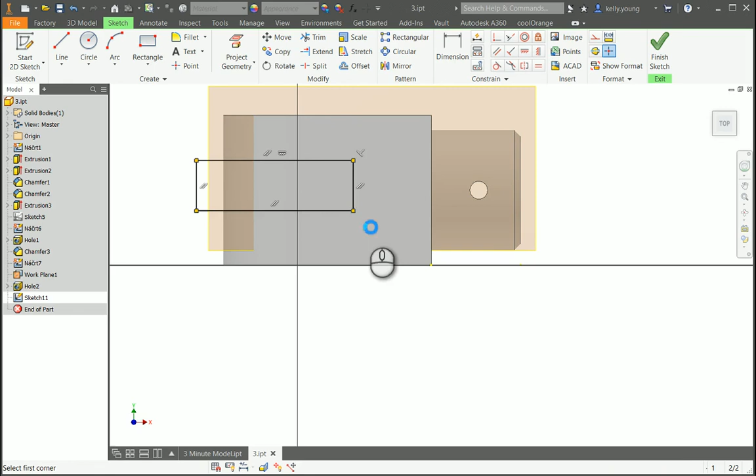I'm going to show you a couple things. First off, we can easily cut your part just by drawing a simple rectangle and cutting through all. That's an easy way to do it, just from what you have right here.

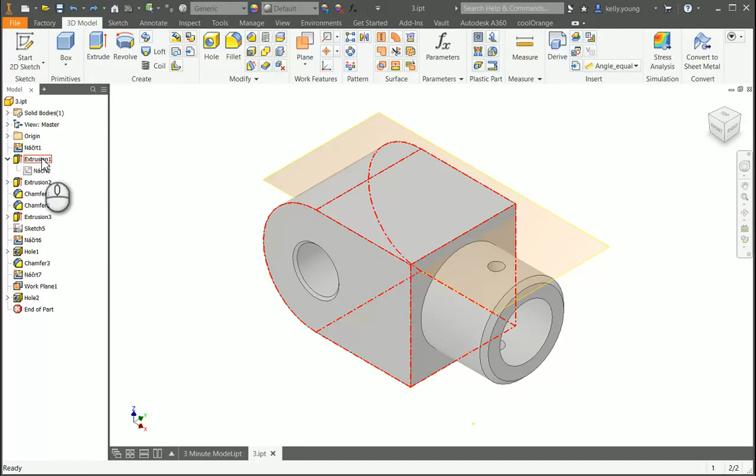But a better way, if we go back here, so we got your part here. A couple of things I wanted to mention to you. So right here you have your extrusion, and first off it's going one way from the origin, so you have your origin planes here. You can switch this to go both ways, and that'll put it in the center, which will then give you your origin plane here and here.

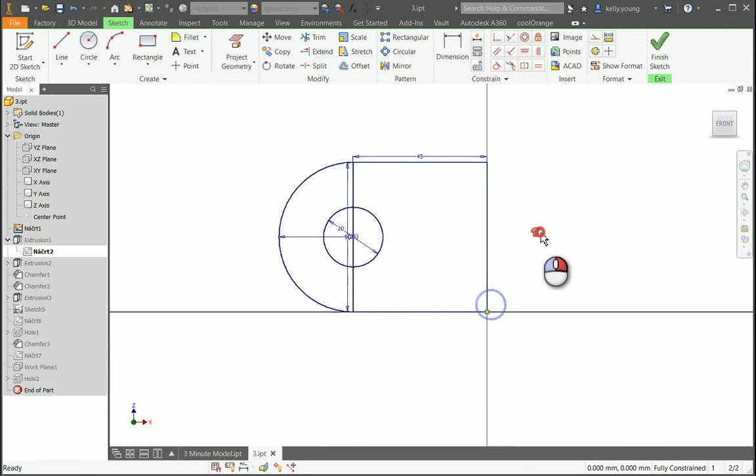Now this one also, the origin plane isn't through the center of the part, so if we go actually into the sketch and delete this real quick and then bring it back in the center point, project that geometry, and then put the midpoint here onto the center point, so that way everything's in the center.

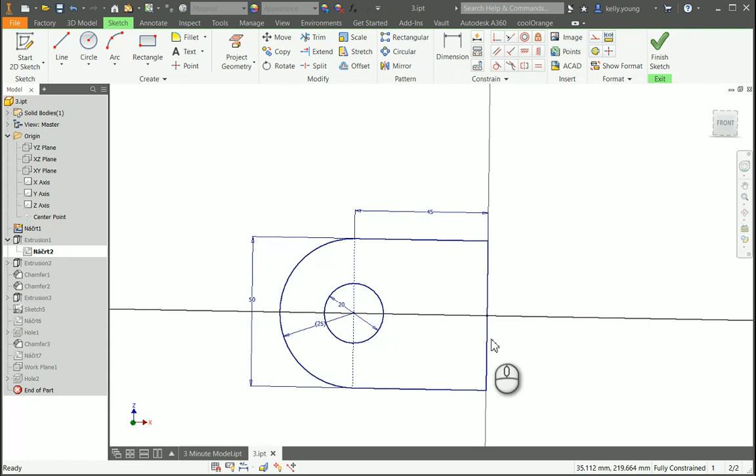Also, this line, we're going to make that construction line because it's not actually doing anything other than giving us some problems. Your dimensions are in the middle here, so I'd kind of drag that out for clarity just for yourself when you're making it. So also you have these dimensions going to the center, so instead I'm going to delete this out. Oh, take that back. That's fine.

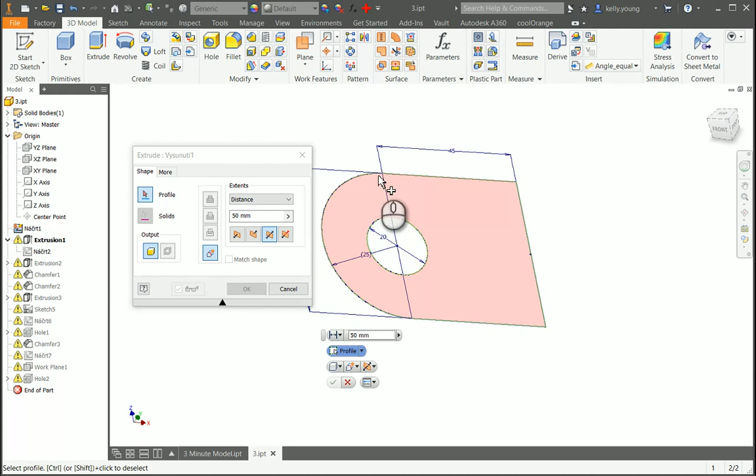So our extrusion, we're going to redefine this profile, because what you have now is you can select this entire thing. Before, you had that line that was solid, it was preventing you from doing so. So if we select the middle, it goes to there. We're going to delete this hole because now it's included in that first one. And we can actually delete this sketch too. And then this one. So we're going to redefine this to that face first.

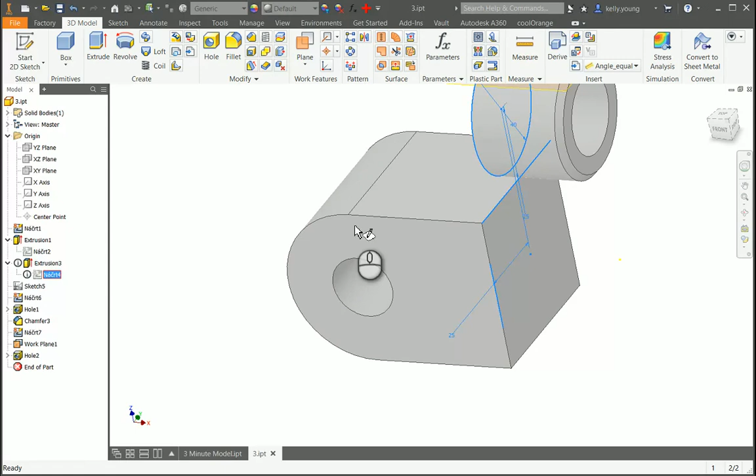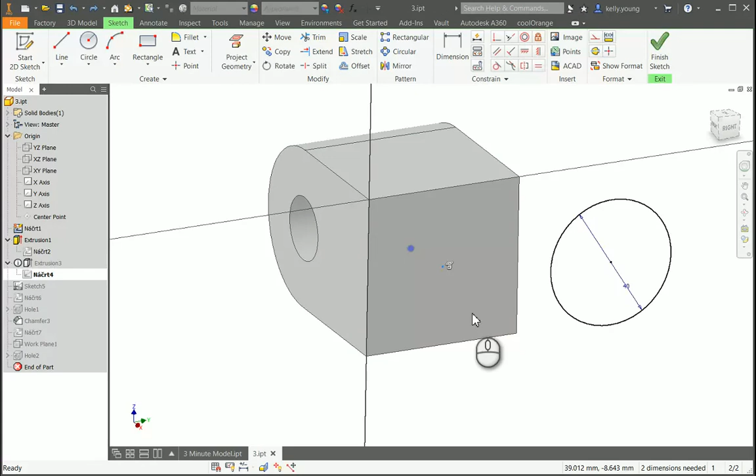And you can see that this kind of went crazy because this hole is dependent on that edge that the dimension is for. So I'm going to delete that, and I'm going to delete this. So that way this is fully unconstrained. Project the geometry of this entire face, and it brings it in. So I'm going to delete that too. So project the face.

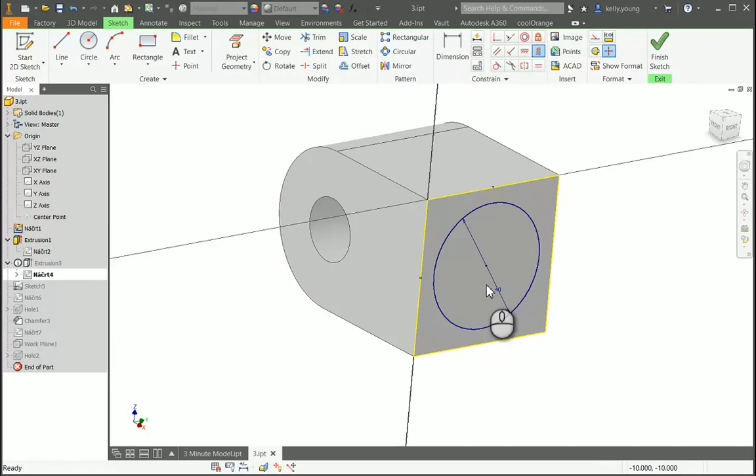Then you can use the perpendicular. So you select the center point of that line to here, so it's always in line, and then this way for this line. Now you could do the origin point or the center, because now since we redefined it, the center point goes through the whole entire center of that part. But for this instance, we're just going to leave it like that. So now it sticks to the center.

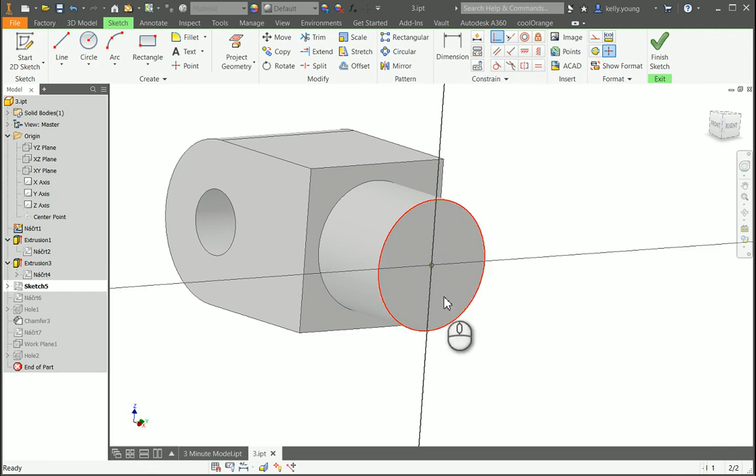Moving forward, you have a center point here on this sketch, which I think I might have broken something. Anyway, so project this, stick to the center. Keep going. So now we have our hole off that center point.

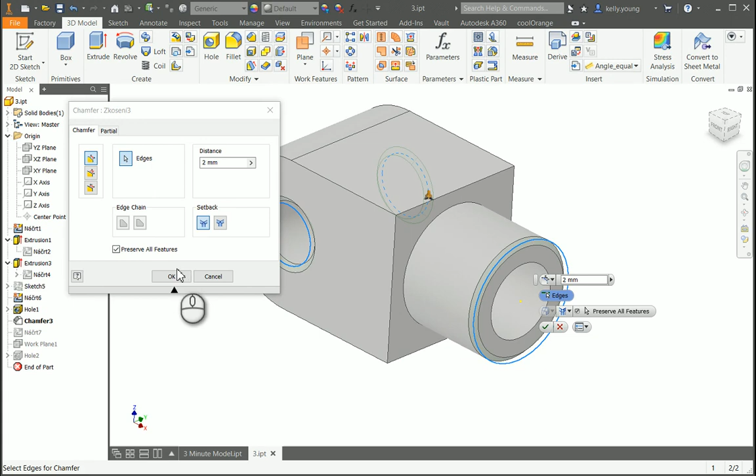Those chamfers. So I deleted the other chamfers. So you have a 45 and a 2 mil. The distance always does 45. So you could just select multiple ones instead of having to do one on a face. So if you know it's going to be a 45-degree angle, you can just use the distance command and it'll go both ways. If you want, you can do the distance and the angle, but this is always 45, so just be aware of that. Now we can select multiple ones in a single go.

So then we're getting into our holes here. Now you have this sketch 8 defined on this plane that you had to create. Well, if we redefine this to our new center plane, we can delete this entire sketch there. I think this one is not used. I think this one's not used. Nice.

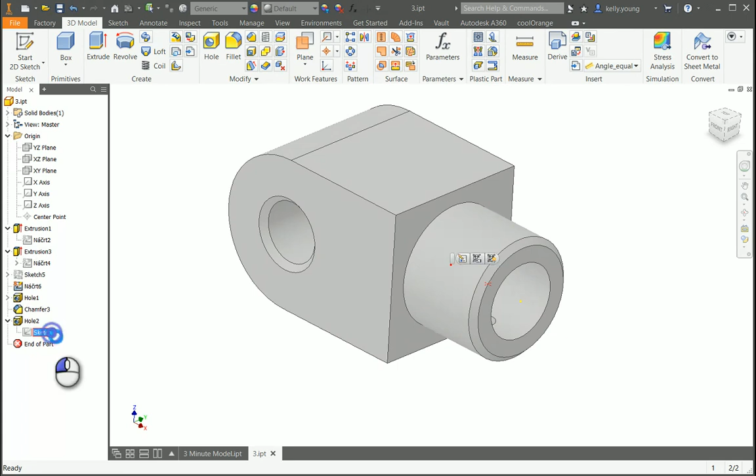So now our sketch is here. If we go to our wireframe, it needs some dimensions. So if we dimension from here to there, call that 16. And then we can also use, so now they're in line and it's a set distance away. Or if you're gonna do something like that.

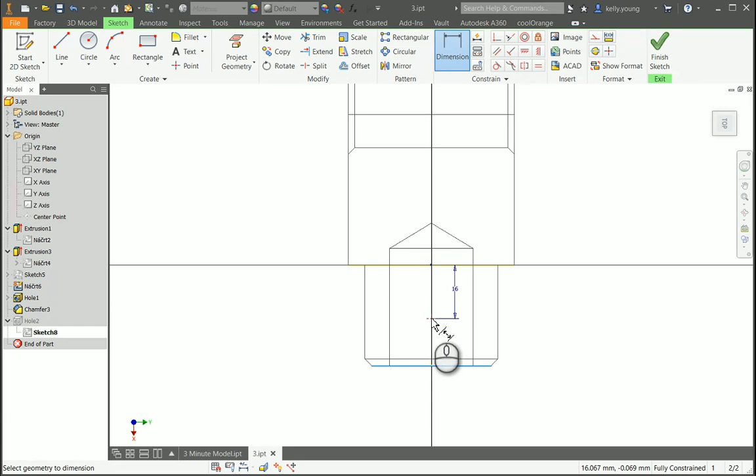So then our extrusion can go through all, both ways. So now it goes up and down. So that's, I think, what you're trying to do.

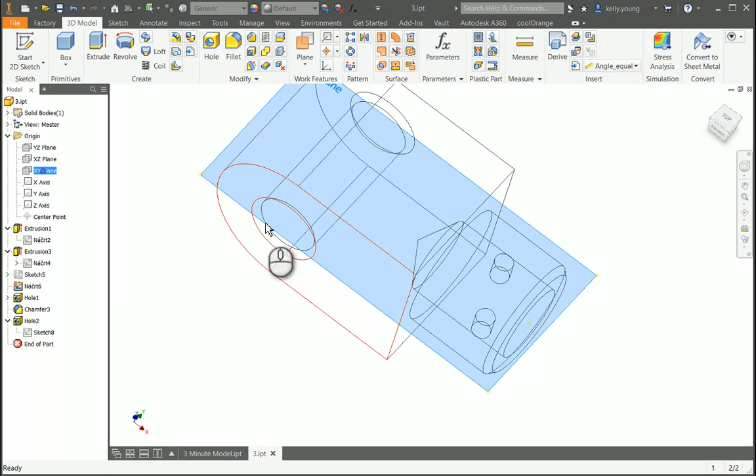And then if we wanted to do our extrusion cut through all, you could either do a sketch from the middle plane here and do project edges, or project cut edges, and it'll cut through the whole part. So that way then you could draw whatever you wanted to. Make sure that the middle point of this is the middle point of there, so that way whenever you change it, it goes the same way.

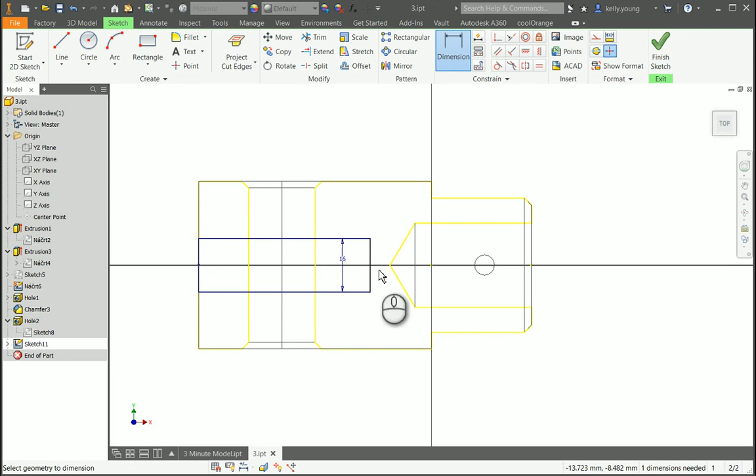So then you can set your distance for this line. Let's say 16. And our other depth would be 52. Finish our sketch, extrude, and then cut both ways through all. So that cuts all the way through. Okay, and you're done. So that's the easier way.

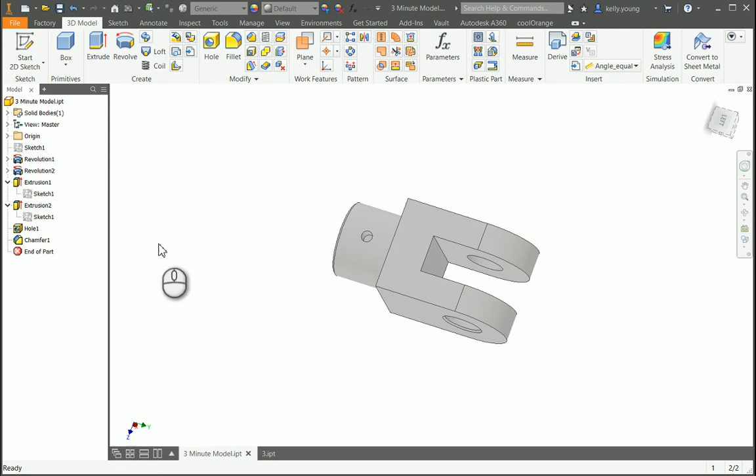You can check out JD's attached model for how to do the revolution. He puts everything in this sketch, which is nice, because then you can cut things like that. So I hope that gets you going, but a simple extrude cut is the answer to your question.